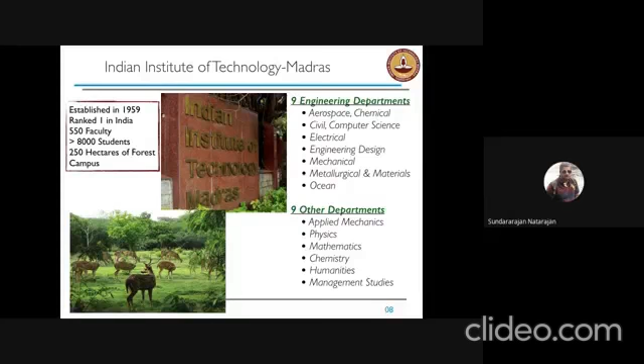I belong to the mechanical engineering department, where we have 6 research focus groups. We are around 65 faculty members with around 350 undergraduate students, a little more than 500 master's students, basically MTech students, and a little over 500 research scholars.

We have 2 types of research programs here at IIT Madras. One is the traditional doctoral program. We also have Master of Science by Research, where the student is expected to do original research as part of their master's program. There are 6 research groups: Advanced Computational Engineering, Materials and Design, Manufacturing Science and Engineering, Dynamics, Acoustics and Controls, Energy Science and Engineering, and Micro Nano Bioscience and Engineering.

Although I fall into all the research focus groups, my primary affiliation is towards the first one, computational engineering. We also have specialized centers for rehabilitation devices, non-destructive testing, and combustion research, which is unique in India. So that's all about my institute.

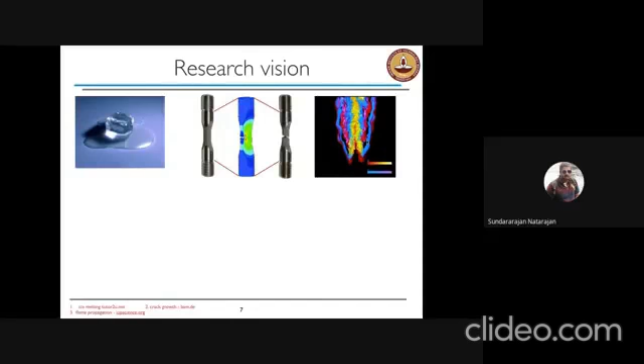The same applies to the last case also, where there is a flame front which evolves or changes its shape due to certain other conditions.

My research vision is to look at the centrality of a mathematical formulation across the discipline so we can have an impact on a variety of fields. Predominantly my focus is not specific to one class of problems, say solid mechanics, but I look at general differential equations.

I'm interested in looking at moving boundary or free boundary problems because they have wide applications in a variety of fields. For example, you can try to simulate baking crumpets, or tumor growth, or assessing damage in complex structures.

My interest is to come up with common building blocks which can help us make progress in a range of disciplines. Although today my focus would be mostly on metals and how crack growth can be modeled using some new techniques, a similar framework can be adopted for other physics, for example.

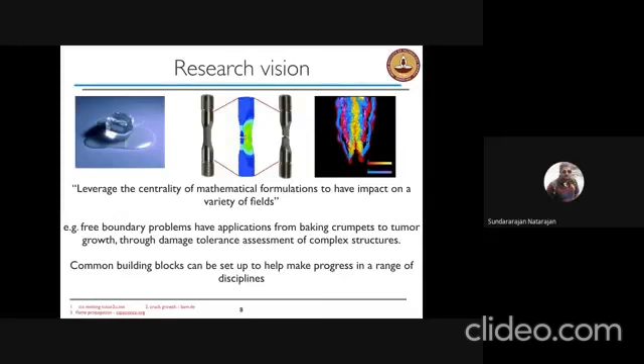Computational mechanics has revolutionized design, so it can probe into areas where theoretical or experimental investigations are difficult. It is applied to civil, structural, biomedical fields, and also used in finance modeling. You name it, computational mechanics has a role to play now.

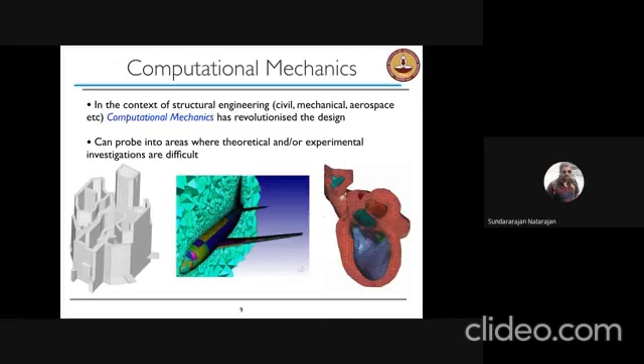A typical framework is what is shown here: let's say you have a physical problem, and this physical problem is continuous in nature, and we try to understand what is going on with this physical problem. The way we do it is to get help from mathematics.

We seek help of mathematical modeling, observe the physical problem, and convert that into a set of differential equations. We hope that by looking at the solution of the differential equations, we can interpret or understand the physical problem.

For example, if I'm looking at the stresses in a turbine blade, I would pose this as a set of differential equations and then try to solve them to understand the response, such as shown on the extreme right with the color contour plot.

But the problem lies in solving this differential equation. These differential equations are in continuous form, and for complex structures with complex boundary conditions, there is no way you can get a closed form solution.

That's when we go back and use numerical techniques to solve these differential equations. The primary goal of these numerical techniques is to convert these continuous-form differential equations into a set of algebraic equations.

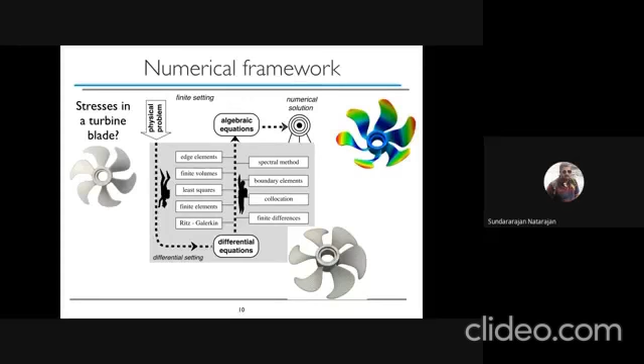If I want to pose this in a mathematical framework, the governing equations are given by differential equations. So, a differential equation, LU equal to F, that's on the domain, where L is some differential operator.

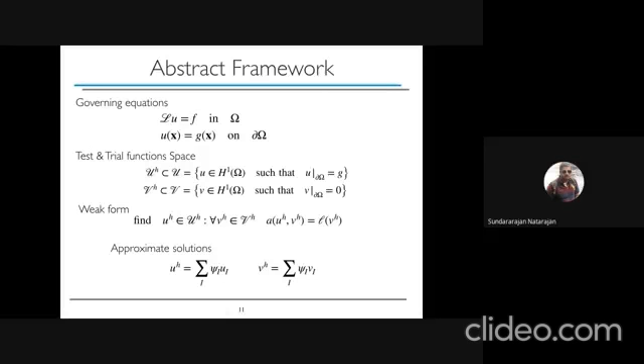We invoke the concept of Galerkin and try to write the equivalent weak form for it, and then try to find the solution, which is the approximate solution in terms of some polynomials. So this is a mathematical framework.

In simple words, what we do is try to divide the region into smaller regions. For example, if we're trying to look at some physics over a circle, we divide the circle into smaller regions. The simplest region could be a triangle, or it could also be quadrilaterals or polygons, but these have to be non-overlapping. That is the most used method.

By assuming the solution over each of these smaller regions, we can now construct the global solution. That's how it works. The same idea also works in case of 3 dimensions, where the domain can be discretized or divided into non-overlapping elements. The standard elements used in 3 dimensions are tetrahedral or hexahedral elements, which are 6-sided or 6-faced elements.

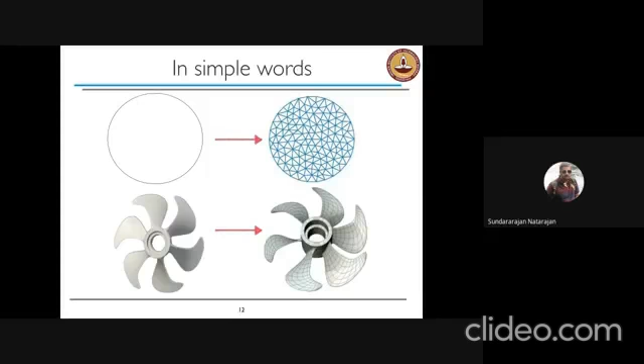The typical process in design is that you have a CAD model, and this CAD model is not suitable for analysis because it has complex shapes. So what we do is spend a lot of time converting the CAD model to an analysis-suitable model. This process we call meshing, and many times meshing is the most expensive step in this whole process. Once you have the mesh, you can adopt any of the previously said approaches to find the solution over this domain. If it's not feasible, you go back to fixing the CAD model. This is a typical cycle for design evolution.

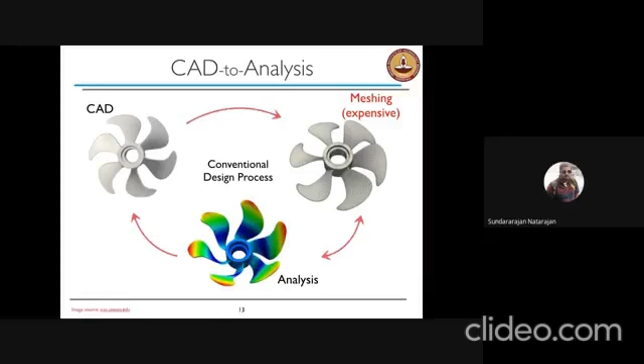For example, the regions that we try to discretize have to have some nice qualities and properties. The foremost property is that the elements cannot be concave, because finite element breaks down if elements have concave regions. Or it cannot have very long elements, which loses some good approximation properties. Although we may start with a good quality element, because of the theoretical framework, for example if you're trying to solve a large deformation problem, we may end up with elements which are badly shaped, and then the analysis breaks down. So we have to stop the analysis, do something called remeshing, and then start the analysis again. That is a bottleneck if you're trying to use finite elements.

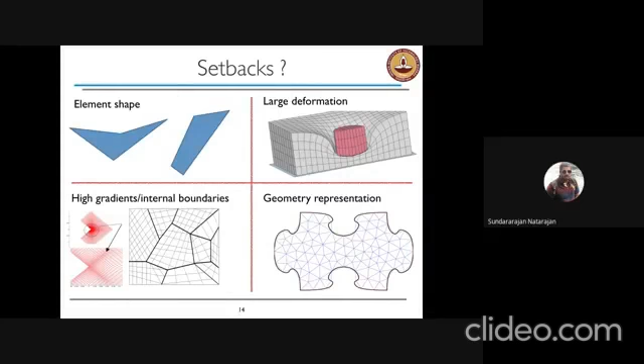Finite element method has also been used to understand material failure, which could be an advantage or a disadvantage. In this slide, I'm trying to showcase where it is not beneficial to have material failure. It's so important to understand when and how a material would fail, and if you're able to predict it, it's going to save a lot of monetary benefit. It will also save a lot of human life.

Understanding damage mechanisms can help us design a structure which is damage tolerant, so we can avoid certain failures which are otherwise inevitable.

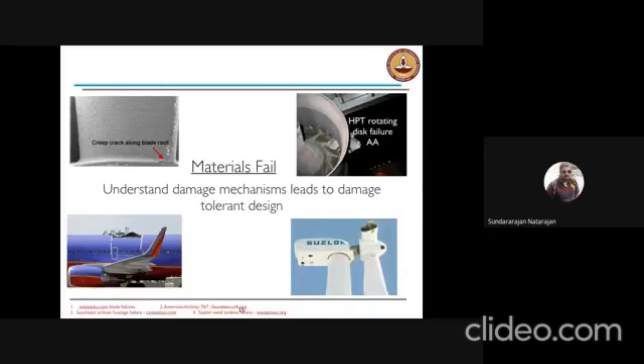Understanding damage mechanisms also helps us come up with a better tool design, so that we know what tool to use to manufacture certain components. Because we should be able to remove materials or drill holes in certain materials, for which we need to understand how the damage mechanisms appear in those materials.

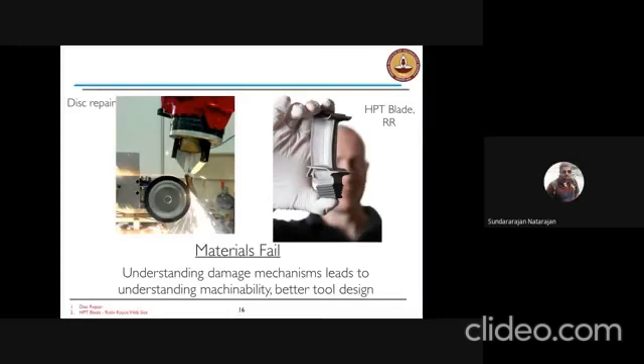A conventional finite element method would require, like I said earlier, a conforming mesh. So here I'm showing two examples. The one on the extreme right, where you see a red line, could represent a crack. Let's say this is subjected to some loading, tension or fatigue loading. If we were to use finite elements, every time the crack moves, we would have to update the mesh, which could be a non-trivial task, especially with multiple cracks in 3 dimensions.

This is a typical example of a phase change problem, like what we've seen in a solidification problem, where you have two different phases, and this orange line depicts the interface between them. As time changes, the shape of the interface changes, and if you use finite elements, you would have to update the mesh every time it changes.

Updating the mesh is not the only issue. We also have to port the information from the previous mesh to the new mesh for subsequent analysis, which may introduce certain errors in the simulation. This has opened up a lot of research activity to come up with efficient techniques to model these moving boundary problems with finite elements.

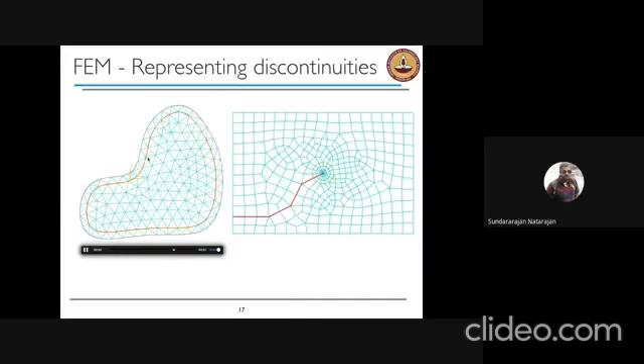In this talk, I'll focus more on fracture mechanics. There has been a lot of work on improving or using finite elements to solve crack growth problems in materials. The first is based on remeshing finite element, the one we saw in the earlier slide, where the mesh is updated every time the crack grows in time or changes shape.

In the late 1990s, a method was introduced called the extended finite element method, now also available in Abaqus as an add-on. The beauty of this method is that it doesn't need a conforming mesh to capture the crack growth—the crack can independently grow on a background mesh. There is also a formulation called peridynamics, which works on integral formulation and is also currently being heavily researched to model fracture growth.

In the late 2000s, there has been the idea of using phase field methods, originally used for modeling phase change materials. Now people are trying to use phase field models to model crack growth in materials. In today's talk, I will focus on three topics: extended finite element method, a method called scaled boundary finite element method which has some nice advantages, and lastly phase field method.

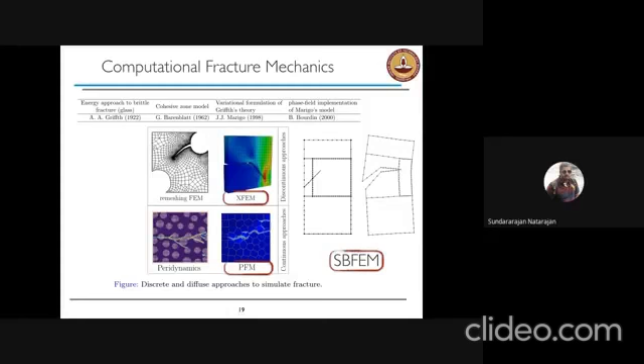The first topic is going to be the extended finite element method. This comes under a bigger umbrella of methods called partition of unity methods, and here the idea is to detach geometry and analysis. Remember, finite element method requires a conforming mesh. So the whole idea is whether it's possible to come up with a method where the geometry can be independent of the mesh, and that's how the extended method works. So the basic idea was...

Excuse me, is there a question? No, you can continue, Sundar.

The objective is that if I have an interface, for example a circular interface, a flower-shaped interface, or a crack shown by a solid black line, is it possible to represent them independent of the mesh? Not only represent them, but also capture the underlying physics, without a mesh that conforms to it. Conventional finite element would require a conforming mesh.

For example, if I'm trying to solve a crack problem, I need singular elements aligned to the interface, and an extremely refined mesh close to the crack tip to capture the singularity. Remember, finite element works with simple polynomials, and polynomials are not really good at capturing singular functions.

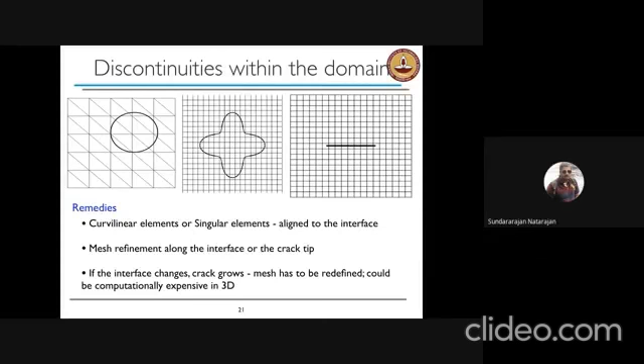Although if it's a static crack or static interface, coming up with a mesh is not a problem, even in 3 dimensions. But the real problem comes when these interfaces start to change shape or evolve in time. This becomes computationally expensive in 3 dimensions, or if you have multiple cracks, holes, or inclusions.

Conventional finite element method would have to differentiate a hole and an inclusion, whereas in XFEM they can be treated in a unified way by just using appropriate enrichment functions, which you will see in a couple of slides coming up. And it's very robust in that sense.

It can also model crack growth. It can also have these cracks coalesce, branch, it can do all sorts of things with a mesh that doesn't update every time.

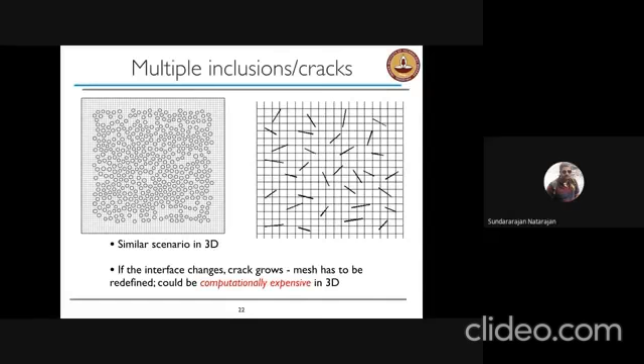So when do we need enrichment technique? We need enrichment techniques when you have discontinuities in your model, for example cracks or material interfaces. If you have large gradients like yield lines or shock waves, or if you have singularities, for example cracks, or a re-entrant corner, or a boundary layer in your problem, like a fluid-solid or fluid-fluid interaction.

Or if your solution is highly oscillatory. For example, if you're trying to solve a Helmholtz equation and looking at mid-frequency or high-frequency problems where the solution is highly oscillatory, and we know that typically you need at least 10 elements to capture the wavelength. So if I'm looking at a really high frequency, my computational expense just grows exponentially. But by using XFEM, we don't have to use such a highly refined mesh, but still capture the essential physics of the problem.

The basic idea is that we will add certain functions to the finite element basis that can capture the necessary physics. The idea is to improve the convergence rate, because when you use finite elements to solve these problems, the optimal rate of convergence reduces by one half for certain cases. So we want to retain optimal order of convergence with finite elements, while also capturing the necessary physics with a mesh that doesn't conform to the geometry. That's the whole objective.

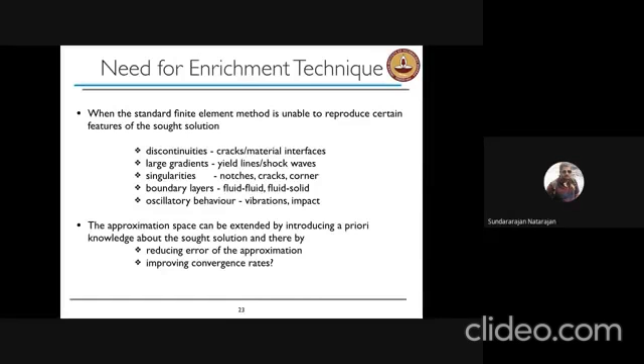This is one example of how people try to model cracks. For example, they use what is called a quarter point element, a special case of an 8-noded serendipity element, where they place the crack tip on one of the corner nodes and move the mid-side node to one quarter of the distance from the crack tip. By doing this, we can capture the singularity present at the crack tip. But this works for isotropic homogeneous material; for other cases it doesn't really work that efficiently.

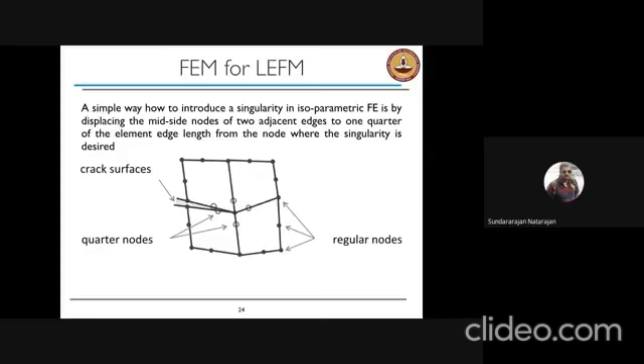That is also one reason why there has been a lot of research in coming up with methods that can capture the physics of the problem. For example, if it's a bi-material interface and you have a crack between those interfaces, the singularity is complex, so this sort of arrangement doesn't work in favor of that.

There has been a lot of work in trying to improve the finite element method, and I've classified them into three categories, all under a category called enrichment techniques: local enrichment, global enrichment, and mesh overlay techniques. The basic idea in all of these is to have a method where I can model these cracks or discontinuities independent of the mesh.

In this talk, I'm going to focus only on XFEM, although the same sort of framework can be discussed in terms of generalized finite element method, elemental enrichment techniques, and other techniques.

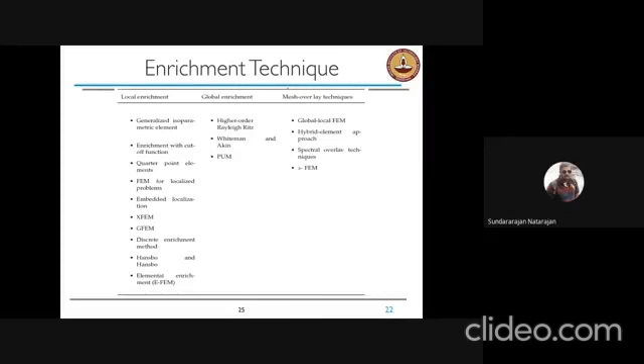The basic idea in XFEM is that you have the standard finite element basis function, and to it you add certain functions that carry the necessary information of the problem. We don't know a priori what these functions are, but we know that if we put in these functions, we can capture the physics of the problem.

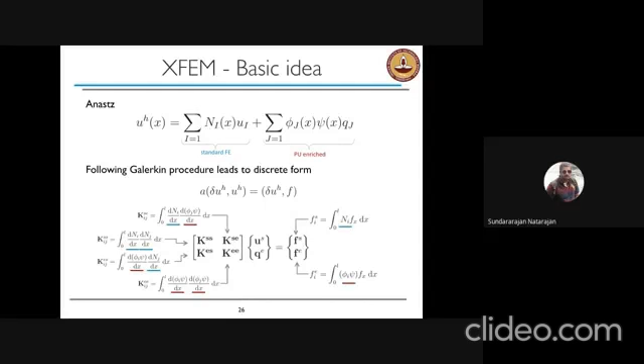For example, the first term, shown in blue, is the standard approximation for your unknown field. The one shown as PU enriched is the new function we add to the standard finite element basis. Here phi_j's are standard finite element functions, and psi_i's are the functions which carry the necessary local information of the problem. So if I'm trying to solve a...